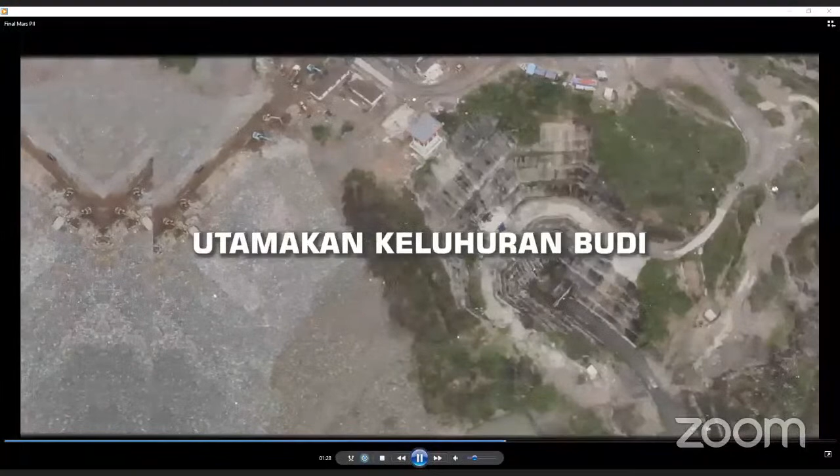Nasionalismenya, utamakan keluhuran budi, amalkan ilmu dengan kompetensi, berikan yang terbaik, selalu yang terbaik, sebagai karya baktimu. Teruslah berjuang membangun Indonesia, sejahterakanlah bangsa dan negara.

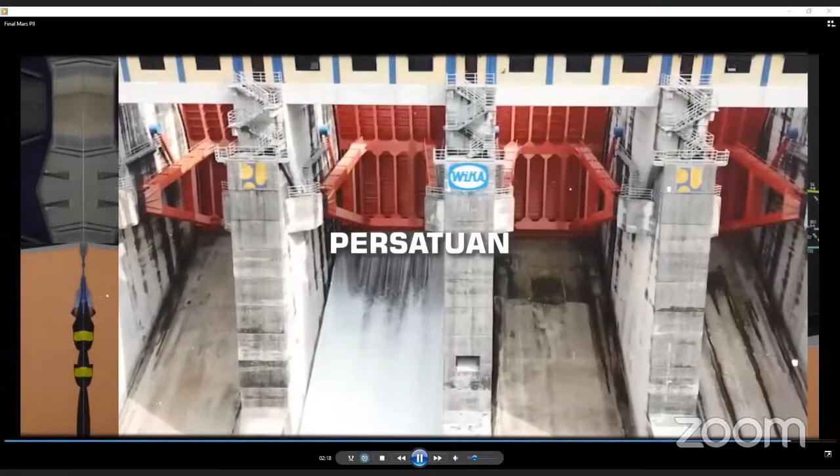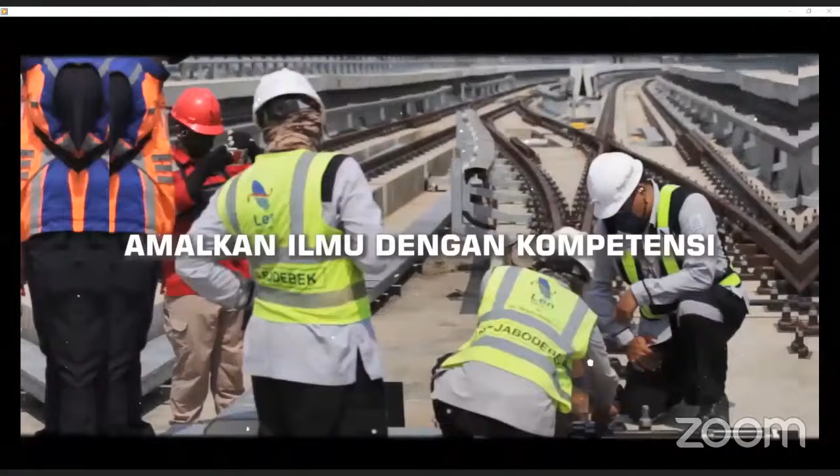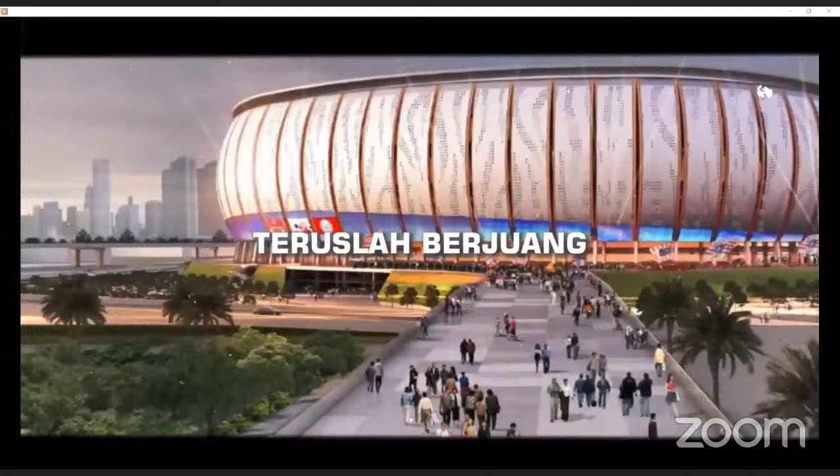Insinyur Indonesia senantiasa menjunjung tinggi integritasnya, bekerja sungguh-sungguh dengan semangat profesionalismenya, utamakan keluhuran budi, amalkan ilmu dengan kompetensi, berikan yang terbaik, selalu yang terbaik, sebagai karya baktimu. Teruslah berjuang membangun Indonesia, sejahterakanlah bangsa dan negara.

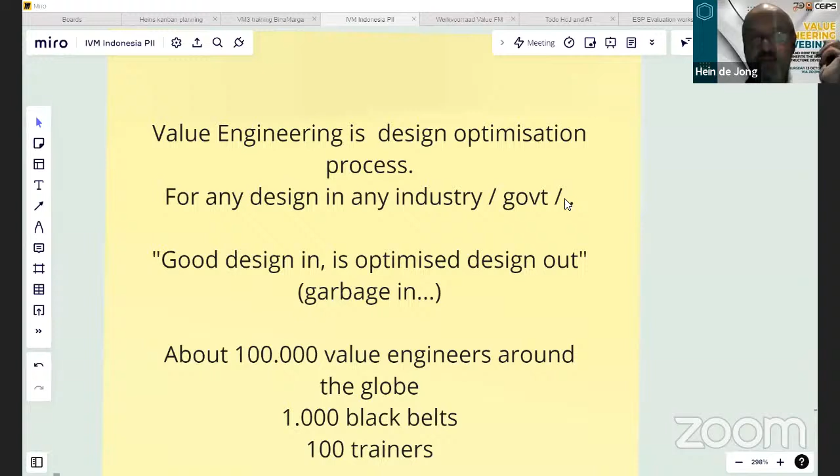Never mind the storm. So it's a design optimization process. Any design can be optimized in industry and government with value engineering. A good design in is an optimized design out if you use this process. Also true, if you put garbage in, it's garbage out. Meaning, we want a good design to optimize, else the conclusion is just that it's a bad design.

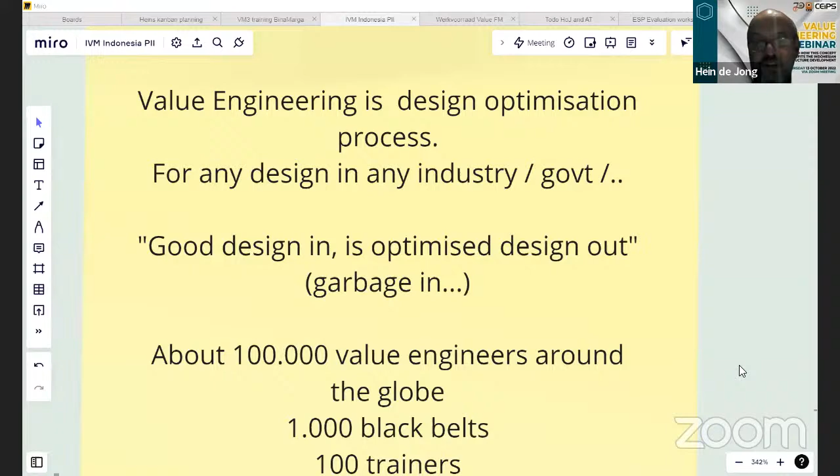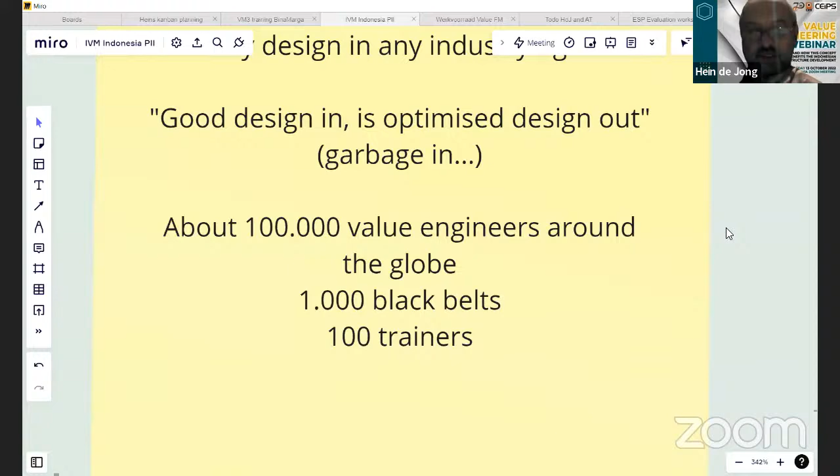There are about 100,000 value engineers around the globe. 1,000 are black belts, those are the heavyweights, and there are 100 trainers. Like PII, there are organizations in Belanda, Germany, USA, Malaysia, Hong Kong, United Kingdom, Australia, Canada, and now PII, which have communities of practice for value engineering. Those are lively places where people share knowledge, make each other enthusiastic, share examples, etc.

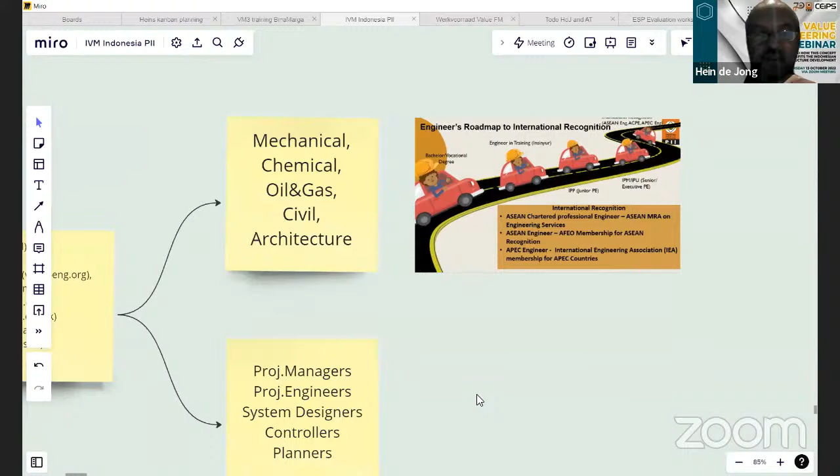It's used in mechanical, chemical, oil, gas, civil, architecture, you name it. And it's used on many levels, from junior - a little bit, not so much - to medior, yes, senior, definitely, to the higher senior level. So the trainings we give are for medior and senior engineers. Project managers, project engineers, system designers, architects, controllers and planners - those are the fellows who can benefit from value engineering.

So I think PII is a good place for us. In the years 2018 to 2022, we did 30 value engineering studies, 12 trainings, had more than 80 people in Binamarga. I started my project in Binamarga 4 years ago. We've got 84 alumni from VM1 - that's yellow belt, green belt - VM2, black belt, VM3. If they get more than 400 hours, they can become PVM, a practitioner in value management.

Can I continue? Yes, go ahead. PVM International Certificate is valid in Europe, and you can cross-certify with the United States. If you work in a multinational, for example, they will know value engineering. And if you have more than 10,000 hours in value management, you can become a trainer, meaning any trainer in the TVM certificate is a very experienced fellow.

The ESP program we did is a program of a lot of projects. It paid itself back about 500 times or more. So actually, Binamarga gets this all for free and earns a lot of money. That's a good deal, isn't it? Not many trainings can make this so clear as we can, because we save money.

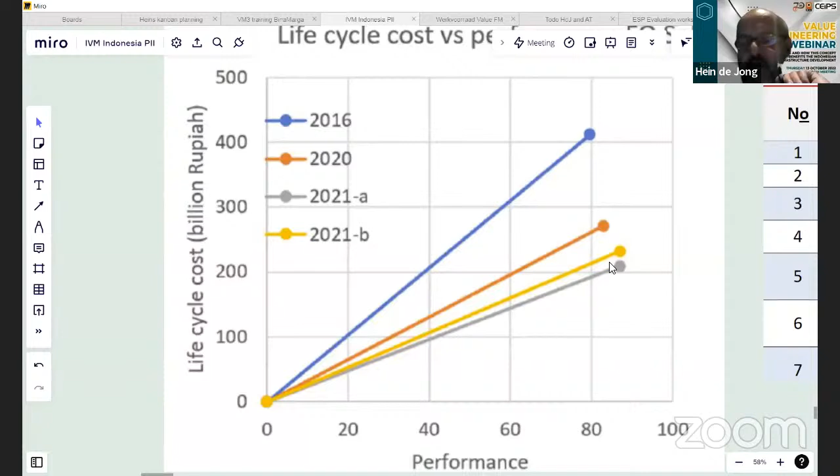So we did a value engineering study, and the price went down - optimization number one. Then we did another optimization, and it went even further down, from 280 to about 230, and one was even at 200 - another saving with higher performance. This is very typically value engineering: can we make it cheaper and get better function and performance? Or if we add a little more money, can we get a way better performance?

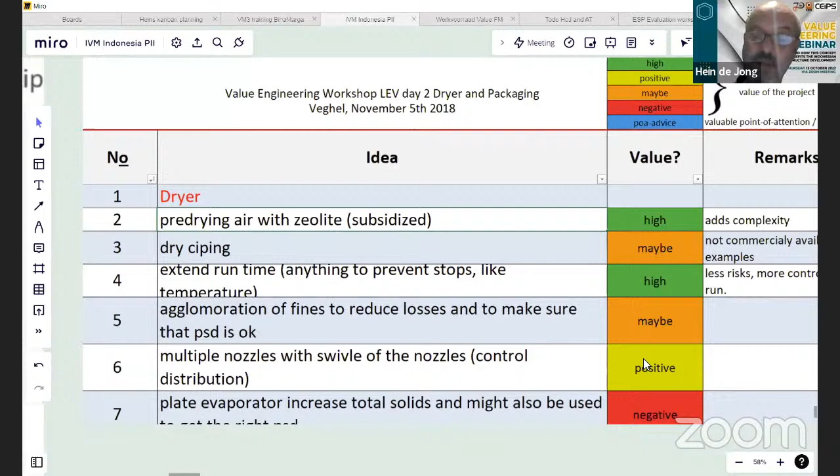Another way to get results is like this: a table with a long list of ideas. This is apparently in a food factory, process industry. You do your value engineering thing - you investigate, prioritize, etc. - and in the end you have a list of ideas with high value, positive value, or maybe unknown value yet. This is the kind of outcome you want to see from a value engineering study: lots of optimizations, sometimes in the form of a complete scenario for a topic, sometimes as a list of good ideas to implement.

No, wait, I moved that.

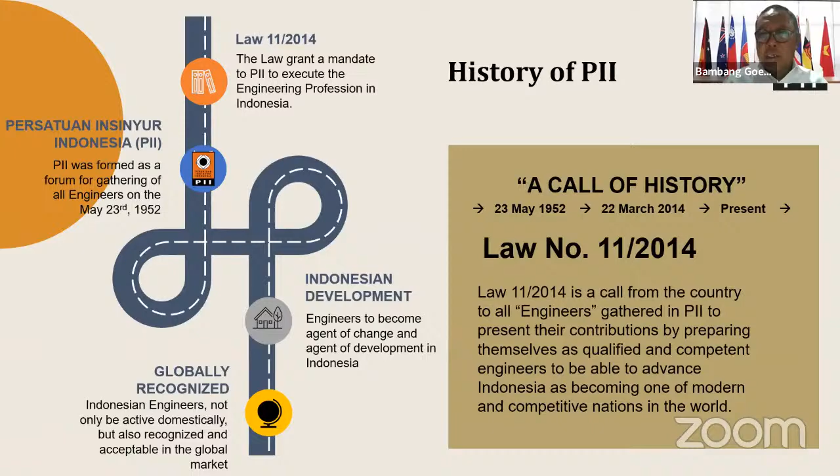There are 3 elements under the law. Firstly is collective message for engineers, as I mentioned before. And then the law also described that PII is the implementing body of the engineering profession. And then thirdly, the important part of the law is that the government, PII is the government partner in preparing human resources engineers to support national development.

So we often call this the transformation of the engineer, where the task of PII becomes very large now. Firstly is accreditation of engineering education in the university, and then the engineers profession program, what we know as certificate competency engineer.

The engineers profession program is conducted by university but still supported by PII. So graduates from university are basically still sarjana teknik, but need to be trained about 1 year to become an engineer. In this duration, PII takes a role to support the training and the preparing of lecturers, and also in providing the industry or factory or place to practice his engineering practice, in order to familiarize the practical engineering to the student.

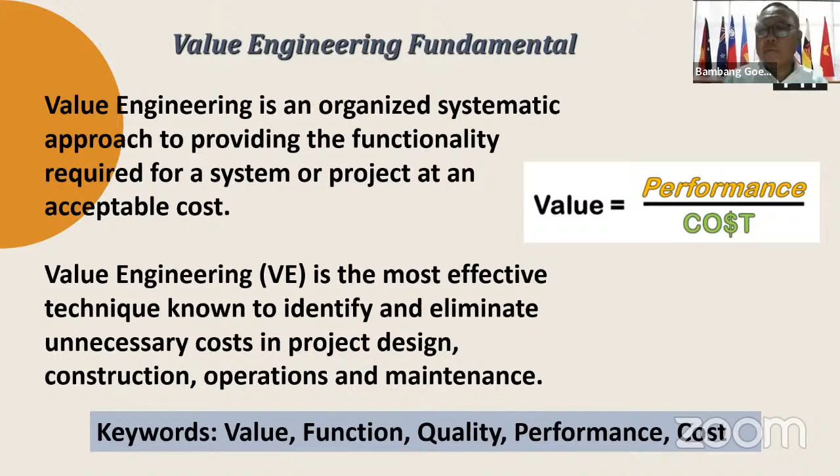The reason why do we need value engineering? It is very important for investment, both by clients or engineers. First, value engineering is very important in order for us to more easily achieve mission and vision. Why is that? Because the cost is lower, of course. There is no value engineering which creates more inefficiency - it must be an efficient way.

Then second is improving Indonesia's competitive capabilities in construction, manufacturing, oil and gas, mining, operation and maintenance. And then also for project owners, it simplifies the decision-making process and reduces risk in the project or system, and optimizes costs in achieving effectiveness.

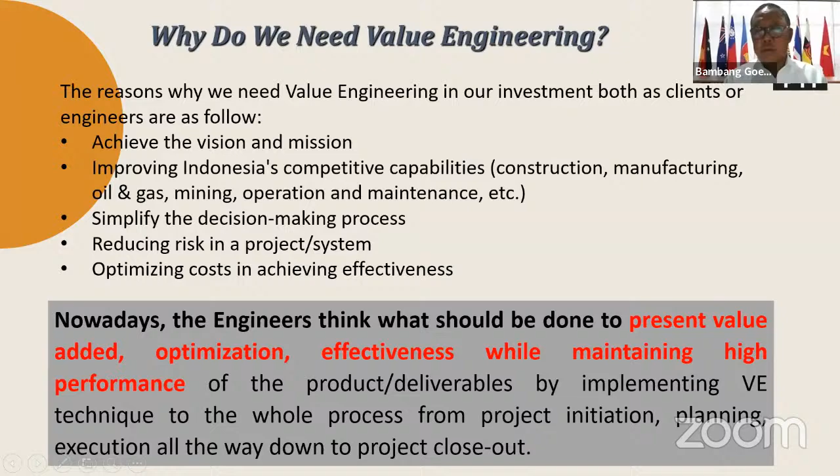Then how does PII bring this up to speed? Under PII we have a unit called the Center of Engineering Industrial Policies, or CEiPS, that will initiate VE community of practice. I think the chairman or head of the chiefs is already in this room as well.

And then invite all engineers, professional engineers within engineering colleges, badan-badan kejuruan, which is about 27 badan kejuruan under PII, to upskill their competencies on value engineering. And then promote VE through a series of webinar courses, and promote Indonesian professionals to obtain qualified and certified value management. And finally, also promote these VE benefits to both government and private clients.

As far as I understand, some government offices, ministries, are already applying VE management in their activities - as I heard, Bina Marga has already done this. But I hope that it will be enlarged, broadened up to many more government agencies, ministries, etc., and also in state-owned companies.

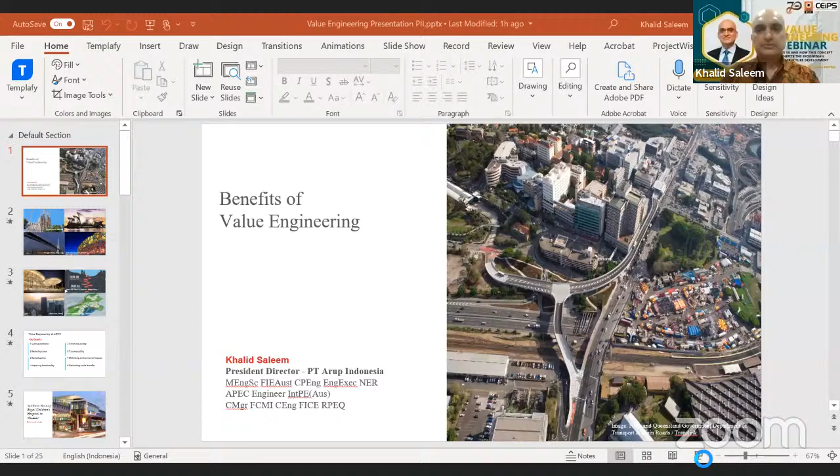I will be talking about a project, really looking at what you've already heard from other participants about what value engineering is, but I'll take you through the application of value engineering.

Just a brief introduction of myself. My name is Khalid Saleem, I'm the President Director of PT Arup Indonesia. I have a background in structural engineering, particularly in design and construction of bridges. I'm very passionate about bridges, hence my presentation will be about a bridge engineering project.

Before I start, a quick introduction about Arup. Arup is a global engineering firm from the United Kingdom. We have done a lot of iconic value engineered projects around the world, including examples like the Sydney Opera House in Australia, the Stonecutters Bridge in Hong Kong, which is a cable stayed bridge, and the Bird's Nest Olympic Stadium in Beijing. All of these projects used value engineering to come up with really fantastic solutions.

There are some examples here from our current and recent projects in Indonesia. Arup was involved in the Indonesia Convention Exhibition, ICE, in BSD City, and the Menara Astra, which is the tallest building in Jakarta at the moment. Recently we completed the master plan of the IKN, the Nusantara new capital city, working on that for 2 years with detailed planning. We are also currently doing the detailed engineering design on an underground section of Jakarta MRT, from Harmoni to Mangga Besar. All of these projects are not ordinary projects - that's where you need innovation and need to apply value engineering concepts.

The definition of value engineering has already been put forward by other participants, so I'd like to talk about the benefits of value engineering. Value engineering is used for solving problems. It reduces costs, it reduces time as well - you can finish the project earlier, much faster. It can improve functionality and quality. You can make a project adaptable for future use. We can also use it for minimizing environmental impacts of a project and maximizing social benefits.

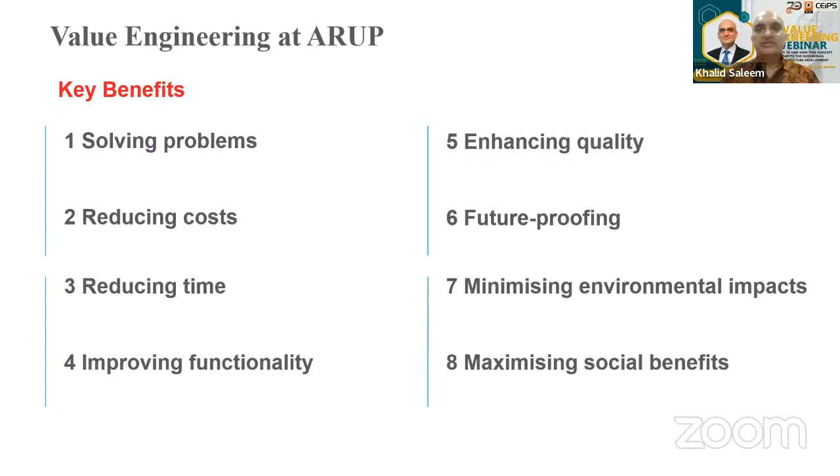I'll now take you through a practical example from an earlier part of my career - a project where every section required us to apply value engineering. It actually won 22 awards, which I'll take you through briefly later. This project finished 2 months earlier than scheduled, and we ended up with a cost saving of $16 million. This is a bus rapid transit project in Brisbane, Australia, called the Northern Busway.

Some details of this project, with some photographs - this is during construction. As you can see, it was constructed through a hospital, the main hospital in Brisbane, Australia, and over arterial roads, main roads, and an operational railway. The project was a 1.2 kilometer long dedicated BRT, fully elevated on a bridge - it doesn't go on a normal road like Transjakarta, but has a separate alignment and corridor which is elevated, all on a bridge.

And then it has a 3-story busway station. The bridge actually passes through the 3rd story where you get on the buses, but coming from the ground floor, you get your tickets and go onto the 1st floor. And then from there, you go onto the 3rd floor to get onto the buses.

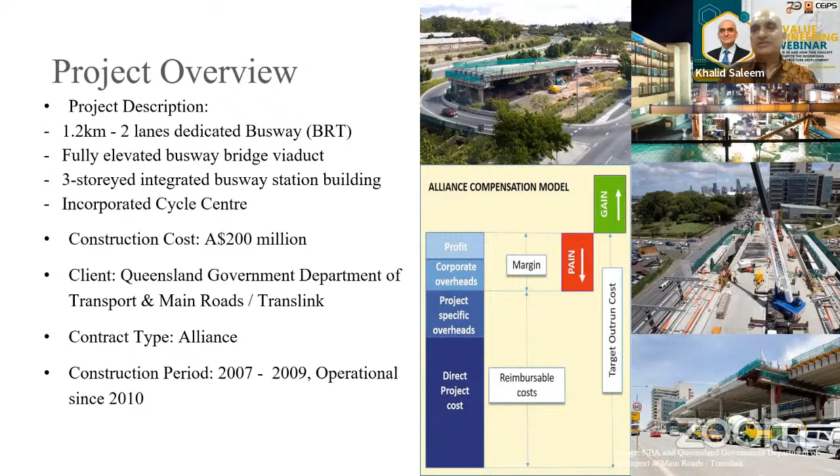This is not a new project, but you will see that if you want, you can use value engineering concepts wherever you are. It's not a new concept; it's been there for quite some time. This project is almost 15 years old. It was constructed from 2007 to 2009, and it's been in operation, with buses using it since 2010. So there was a lot of complexity, and hence we had to use value engineering.

As I said before, as you can see from this picture, it shows what we commonly referred to at that time as the spaghetti or noodle junction, because you can see roads and bridges going all across everywhere. So there were lots of challenges which made this project very complex.

It is constructed inside a hospital, so we had to allow for ambulances and other emergency vehicles coming into the hospital 24 hours, all 7 days. So we had to design for it through value engineering, and we had to construct for it as well with all these issues. And then there were lots of services, like gas, electricity, and power, which supply the hospital here. We had to make sure those were protected, and the supply of electric power, water and gas to the hospital was not disturbed during our construction, and there were no accidents that could adversely impact the hospital.

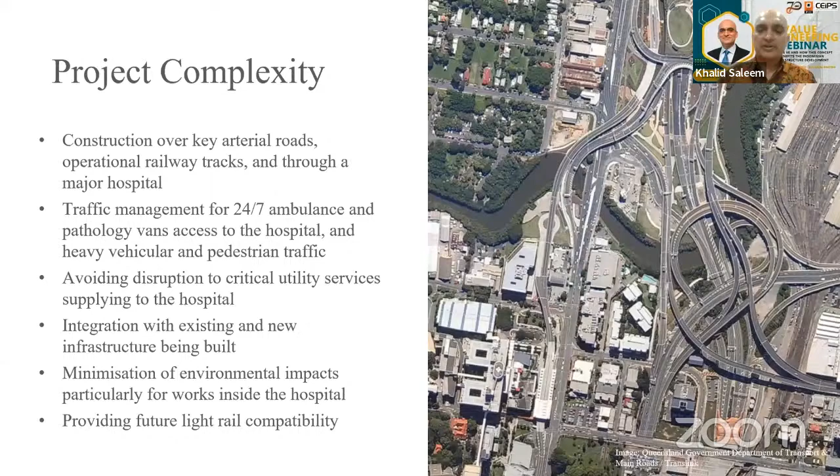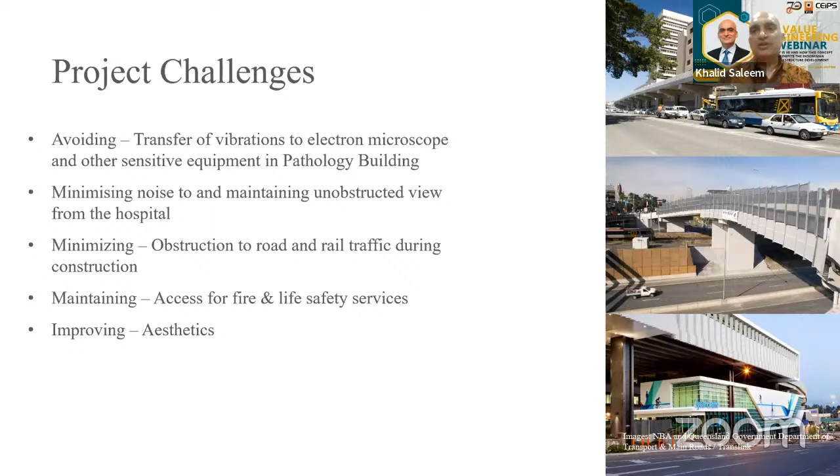Hence, we said we can't use the original design and we have to value engineer this and come up with a new design, which will help us meet all of these challenges of keeping the footpath width, not affecting the services, and providing access, etc.

So as we said before, what can value engineering help with? It can help us in solving problems, it can help us in reducing the cost, and it can help us in doing the construction faster.

In the picture, we were looking at the footpath underneath, as shown in that plan. Normally, if we are constructing a bridge, the columns you are seeing here are actually not in this direction - they are parallel to the beam above. But because we had to keep the footpath below clear, we decided to value engineer it, so we rotated the columns 90 degrees. So now they are parallel to this, and they are not in the center of the bridge as well.

They are actually on one side, so we again still have the same problem of the bridge trying to fall over or overturn. And then because of this very huge bending moment, which is the bridge trying to overturn...

If we had used normal piles like this, where your structural capacity actually comes from the steel reinforcement bar, which is as far away from the center or the neutral axis. If we had adopted this section, we would have to literally fill all of this space with reinforcement bars because of the huge moment trying to make this bridge topple over or fall down. This was not workable. So what we did was, first of all, we rotated the column this way, and then the piles below these columns. What we did is we said, how about we drill two piles next to each other and drill the space in between as well.

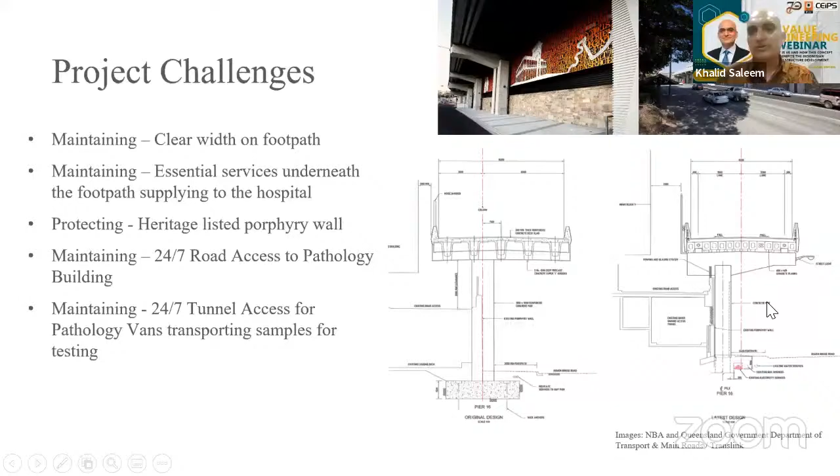We used a temporary steel casing or liner and drilled the pile through this, so there was no impact at all on all of these services. We didn't have to relocate them, we kept them in place. So it saves us time, it saved us cost, but also, as I showed you before, it helped us in reducing the steel reinforcement with the value engineered solution we adopted. So it solved our problems, it reduced the cost, and it reduced the time as well.

But then what do we do? Because with this arrangement we have, we still have to have this beam, which you saw before, on top of which we are going to put our bridge beams, which go along the span - I'll show you in a minute. So we had to again reduce the weight here.

So we said, how about rather than having a horizontal, very deep pier cap, we taper it to reduce the weight? So we use pre-stressing, but we reduce that moment which is trying to overturn and make this bridge fall on the road, significantly, by reducing the weight.

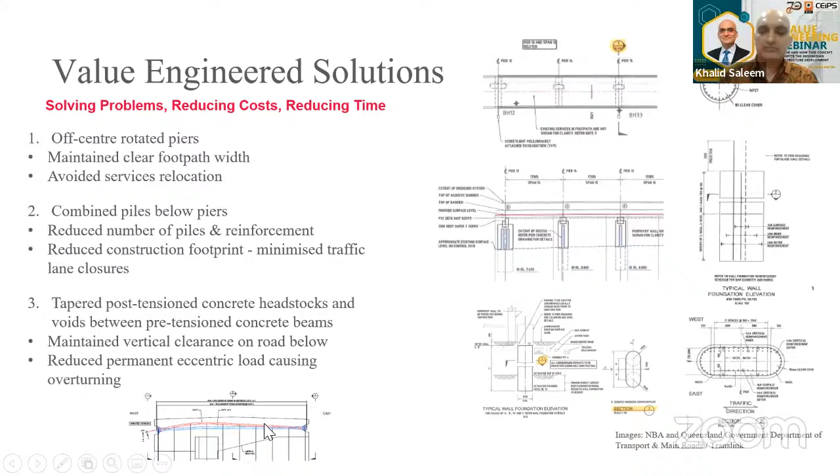And then this is a complete picture of what we were looking at before. As I said, this building has an electron microscope. So what we did was we actually came up with a floating bridge structure, which means we used very small spans - because big spans mean big forces going down and going in - but also we use thick bearings, and all of this is all the way through.

We have not actually tied the bridge to any of the columns below. We're still restraining it laterally - for example, if there's an earthquake, so it still doesn't go and fall down either way. But we reduced, as I said, the weight here by tapering this. It also gave us the vertical clearance which we required on top of the road below. But also, as you see, we have taken off some beams here as well to try to reduce the weight.

So, I'm sorry, it's a very technical presentation, but I wanted to take you through the concepts of what you can do. We can design a bridge or a structure in any way, but if we pay attention to different aspects, we can solve all of these other problems we were looking at before. So by doing this, we actually also kept all of our construction outside of the heritage listed wall, which we were not supposed to touch.

We did not have to demolish this tunnel where all of these blood samples come into this building, so we did not actually impact on anything. The road access was maintained. All of our construction happened outside. We were able to maintain the footpath width, and we did not relocate the services.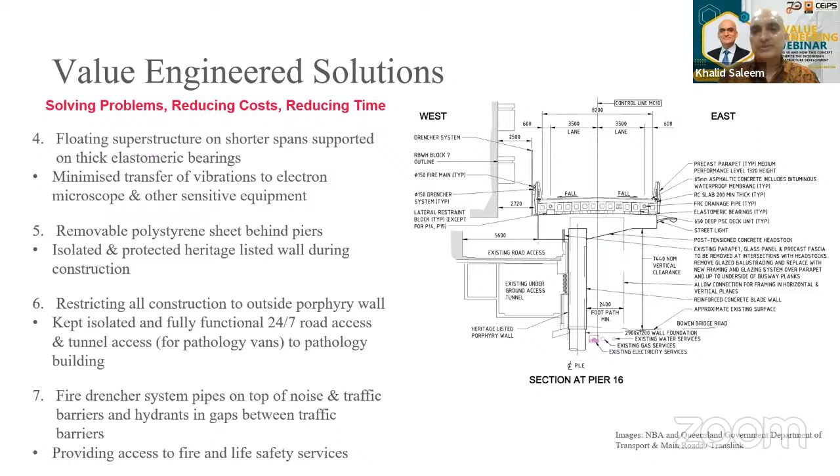So going further, how do we save costs? We tried to standardize everything, so all of the spans are equal length as much as possible, all of the columns are the same dimension, all of the beams are the same dimension. We even tried to keep the steel reinforcement bars the same, so there's an easy way of checking what we have done because there's a lot of repetition.

Once we checked one drawing, it means all of the drawings for the other spans are checked as well, so it saves a lot of time and mistakes on site. It also helps the contractor because they can use the same formwork again and again, saving a lot of time and cost in assembling new formwork. So a lot of cost saving and time saving.

This is an old project, but because the reinforcement was very complex, we did 3-dimensional modeling of the reinforcement about 15 years ago, drawing different reinforcement bars in different colors to make sure we could easily see any clashes and how much clear space we needed so concrete could be poured and vibrated. We looked at all of this constructability as part of our design. That helped a lot in design and construction, saved time and cost, and solved all of the problems I talked about before.

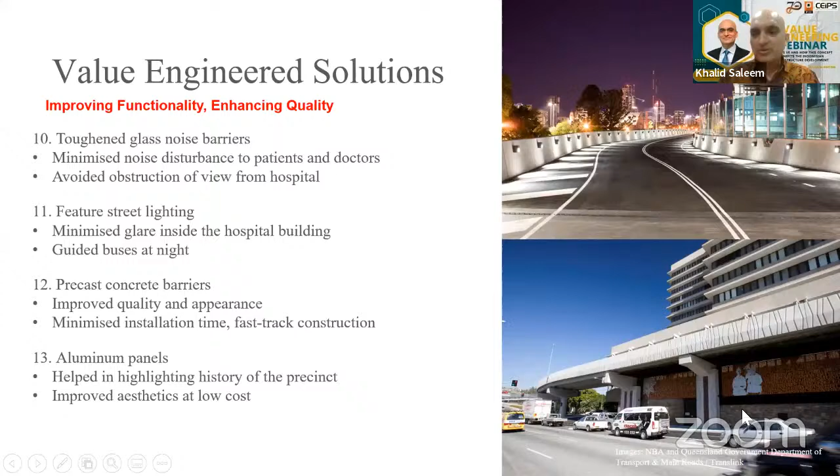Not only were we saving costs, because making concrete with a lot of patterns like this is expensive, we came up with an easier, cheaper solution using very thin aluminum sheeting that hides all the bad things behind it and makes it look nice. The wall below we didn't touch, so it was maintained since it's heritage listed, and we didn't have to take each stone out, number it, and put it back.

As you can see in just one section of this project, a lot of value engineering went in, and we solved problems, tried to reduce cost, and tried to reduce construction time.

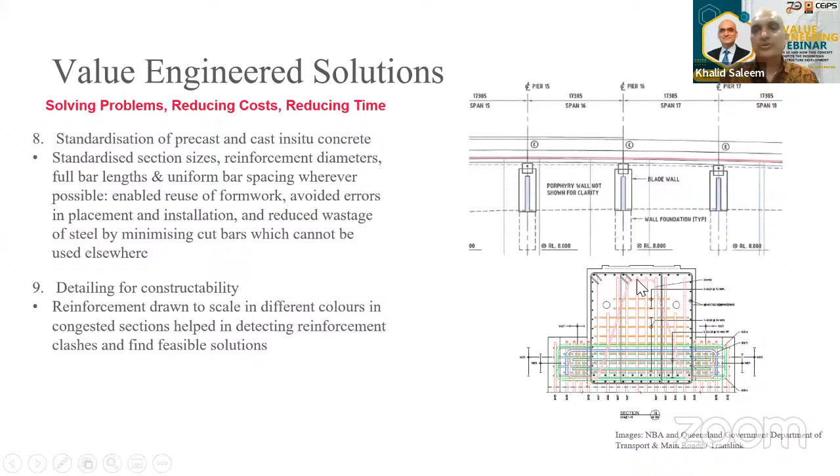At that time we were looking at the reinforcement we saw before. Now people use BIM, Revit, Tekla Structures and other software to do this, but back then it was done just using 2D CAD, and we still looked at constructability and other things, even though nobody knew what BIM was or what it could do for you.

Because this was right in the center of the city, very busy with the bridge going over railway tracks and roads, we actually did three-dimensional modeling using whatever technology was available at that time.

We wanted to check if we used a crane to bring in this precast beam, whether it would actually fit onto the span or not. So we used 3D technology and modeling to check our construction and installation tolerances.

We also developed a tool, again a three-dimensional display which I'll share with you later, built for two purposes. One was that there were lots of stakeholders, including the hospital, commercial tenants, the car park, and everyone wanted to know what the project would look like once constructed.

People asked why we weren't making it underground, said it would obstruct the view and make the city look ugly, and everyone was objecting to the project. So we had to develop this three-dimensional model to show them that it actually looks nice.

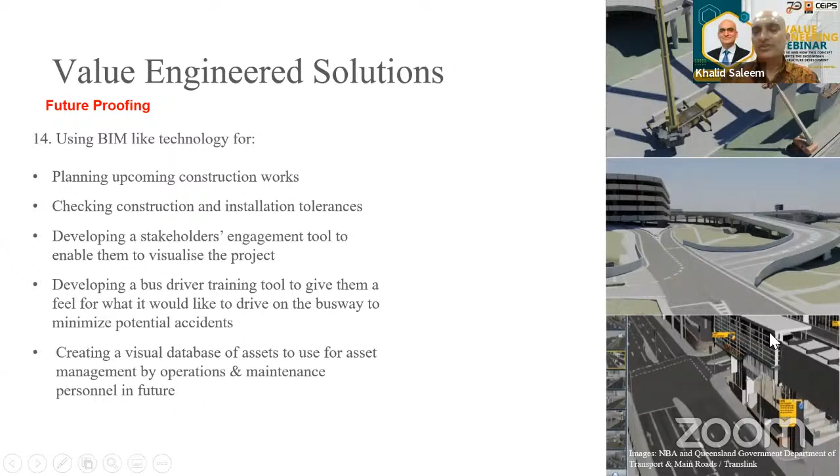Once the bus driver will drive and once the project is finished, what will happen then? During asset management later on, when people come to do maintenance or want to know what is actually inside, what size the beam is or what is in here, all of that was documented at that time.

As I mentioned earlier, although this project has been designed for BRT, the client wanted us to make sure it can be changed into light rail transit, LRT, or MRT in future. So we had to think about that during our design and construction. Now this project is still a BRT, but it can be converted into an LRT with minimum cost and time, because we've already included a lot of provisions that will make changing it from BRT to LRT very quick, easy, and cheap.

Some of the things we did, for example, was the alignment which we adopted. If it's a road, you can make it very steep, up to 6% grade. But if you're using light rail, you cannot use a 6% vertical grade. You have to restrict it to around 3%.

Then the horizontal curves. Normally in a road we use circular curves, but for a railway we have to have spirals on both sides of the circular curve. So although this was for BRT, we designed the alignment for future conversion into LRT, using all the aspects of railway alignment in terms of vertical grade and geometry. Even the bus station platforms were designed keeping in mind that in future the buses would be replaced by light rail.

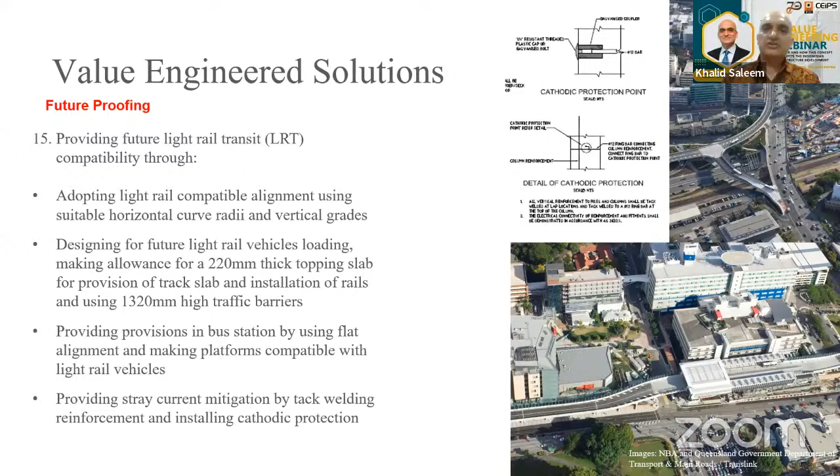Then we talked about using value engineering to minimize environmental impacts and maximize social benefits. We now hear about sustainability and worry about the planet, since we're causing a lot of damage to the environment. So at that time we thought, how about we install solar panels on top of the bus station where passengers get on the buses? Rather than lighting coming from PLN or elsewhere, we generate our own electricity. This was 15 years ago, and we installed solar panels on top of the busway roof to generate electricity for the busway itself.

Then we said, we're collecting all this rainwater here, and there are toilets in the bus station. How about we collect that rainwater, bring it down, and store it in underground tanks beneath the bus station? That water is then available rather than getting water supply from somewhere else—why not use the rainwater we've collected in the bus station where it's required?

Then there was all this empty space left under the bus station, which we thought was wasted space. So thinking again about sustainability, we constructed a cycle center there, where somebody can come on a bicycle. There are lockers and showers inside, so someone can ride a bicycle, lock it up, go to the shower, change their clothes, put their stuff in a locker, then go up the stairs, elevator, or escalator and catch a bus. This encourages people to exercise and saves them from driving cars everywhere—so we incorporated this cycle center into the bus station.

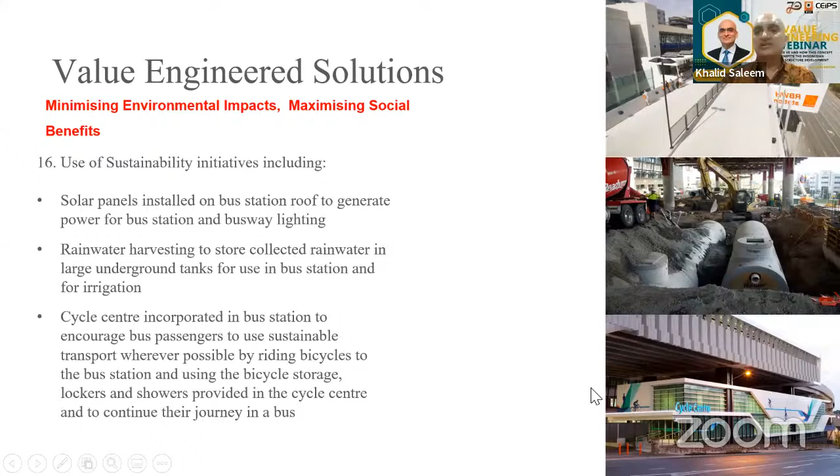So there is a creek which passes through the construction site. The water of this creek is brackish, tidal water which comes from the sea, so it's salty. We didn't want to bring in water from outside for concreting or any other water required, so we installed a mobile desalination plant to purify the water and use it for pouring concrete and all that.

Then it was also thought of that there is construction waste. When we're constructing, we've got steel cut bars, timber or wood from the formwork and all that. So we separated it out right then and there so it can be taken to the relevant disposal place rather than everything going to landfill, wasting material.

Also, as we saw earlier, we try to use a smaller footprint. We kept the footpath but also didn't encroach too much on the ground, keeping everything as optimum as possible - the smallest column size, the smallest reinforcement we can use. So we did that as well.

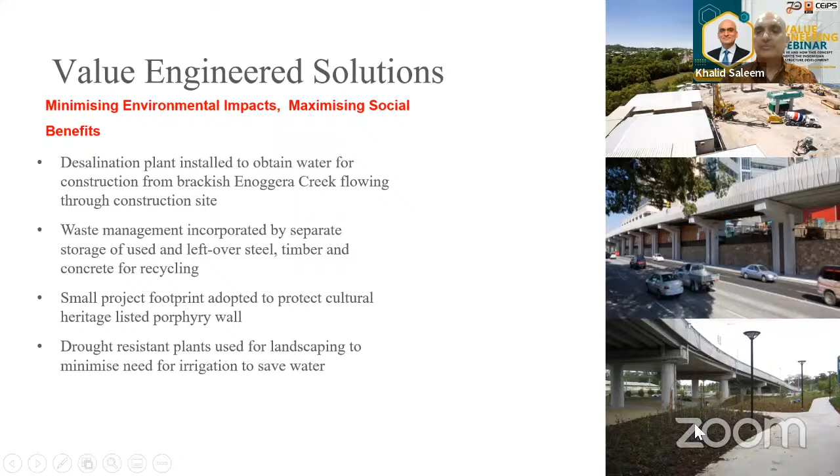For landscaping, we use native plants. We made sure we got consultation from plant experts and asked them what type of plants we can grow here which do not need watering for landscaping. Once you plant them, you just need to water them one time and then they grow by themselves - you don't have to keep watering them. So we thought about that as well and installed the plants accordingly. I think I'm just getting towards the end, so please bear with me.

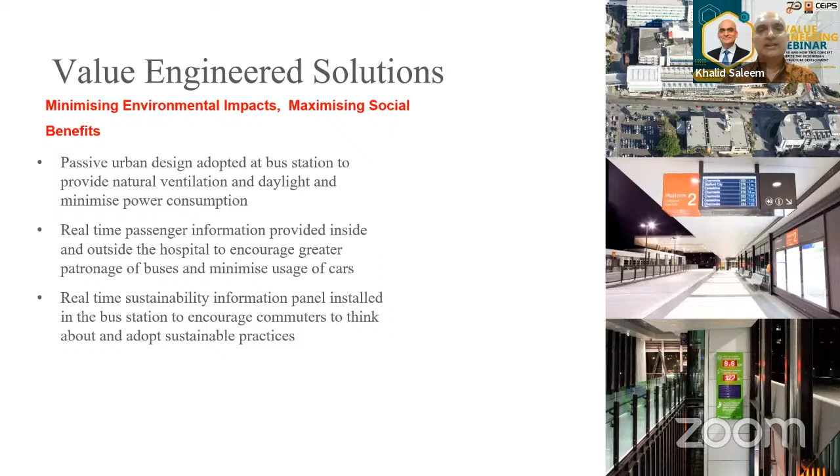We actually put in a sustainability panel to give people information on how much energy is being generated, how much power is generated by the solar panels, and how much water is stored. So just encouraging people. And yes, the client was happy.

We saved $16 million, as I said before. That $16 million was distributed between the government, the contractor, and also the consultant, because that was what was agreed at the beginning - if we save money, everybody will get a share.

Because of the time saving, we finished the project 2 months ahead of program, and the hospital and everybody - nobody had any complaints because we made sure we coordinated with them. So the client, you saw the client letter, was very, very happy and gave us a letter of appreciation.

We won a number of awards from Institution of Engineers Australia. They gave us the award for engineering leadership and project management. We got an award from Australian Institute of Project Management for project of the year, etc. We got awards from the Architectural Institute for public artwork and sustainability.

So I think that's the end of it. I've got that driver training tool and sustainable stakeholders, 3D visualization, which I talked about. I would not show it to you, but I'm more than happy to share it separately because it's about 3 minutes long.

So how do we apply value engineering in Indonesia? Just very quickly, some food for thought for you to think about. If we have a project in the center of a city or urban area, before starting design or construction, we should think about traffic management and suit our design and construction to that. We should try to minimize relocating services like electricity and power - keep it there and design around it.

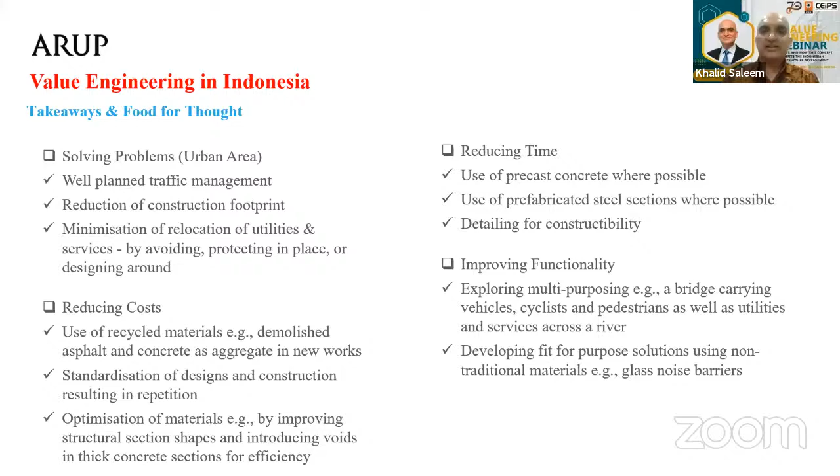We should think about constructability, as I showed to you before, and improving functionality. For example, if we have a bridge over a big river, it shouldn't only be for cars. We can use it for giving opportunity for cyclists, pedestrians, and we can carry services like water, etc. on the other side. We talked about fit for purpose solutions, quality.

That's something which when we're looking at value engineering, we should think about - precast concrete. I talked about future proofing, and environmental impacts.

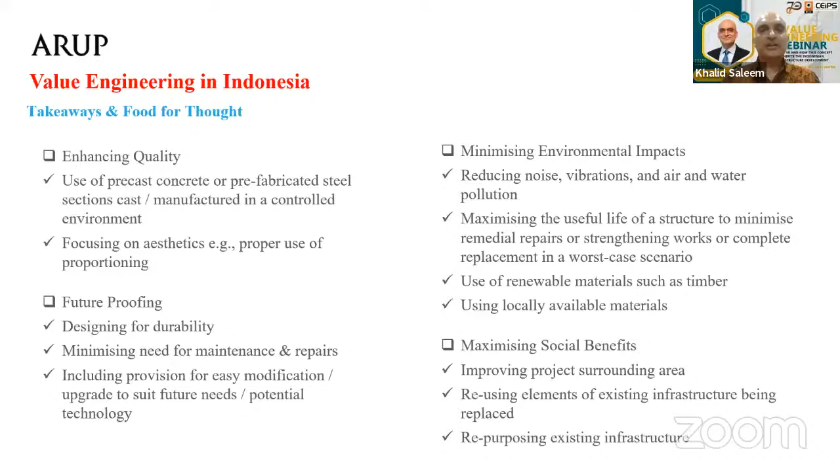Okay, thank you, Pak. Thank you very much, Pak Khalid, for a very detailed presentation on value engineering in civil and structural engineering. So just to summarize, value engineering is not just making a few beams or columns smaller, but it's about looking at the whole picture. So we are way beyond time.

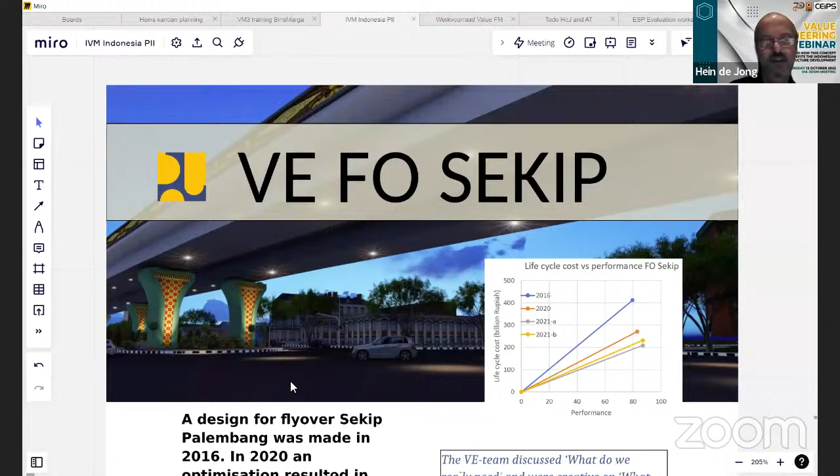I've uploaded a few leaflets from projects in Bina Marga. You can read them. I want to show you one which is in my report now. It was a flyover of Sekip in Palembang. This is an original picture, made in 2016. They optimized it - the project team itself optimized it. So the design from 2016 was optimized, and they already achieved a 28% cost reduction while still a good flyover.

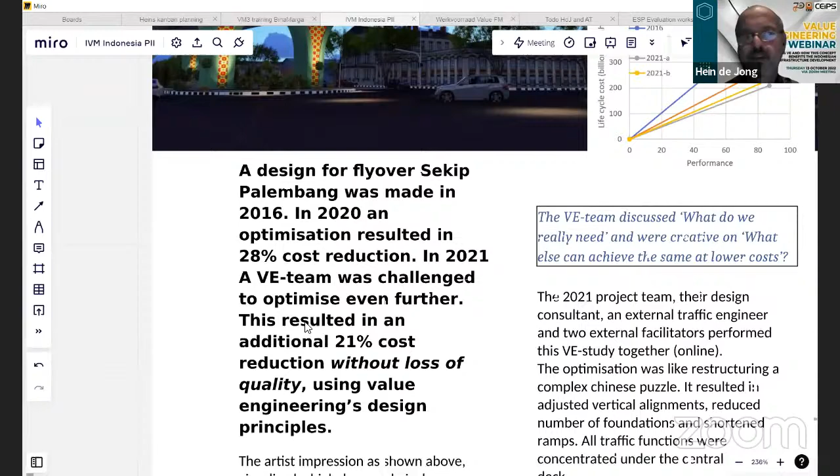And then they challenged the value engineering team again because someone thought we're not done yet. That resulted in an additional 21% cost reduction without loss of quality. So did the designers not do a good job? No, that's not the case. In the first design, they did a good job. In the second design, it was a good job. And in the third design, it was a good job.

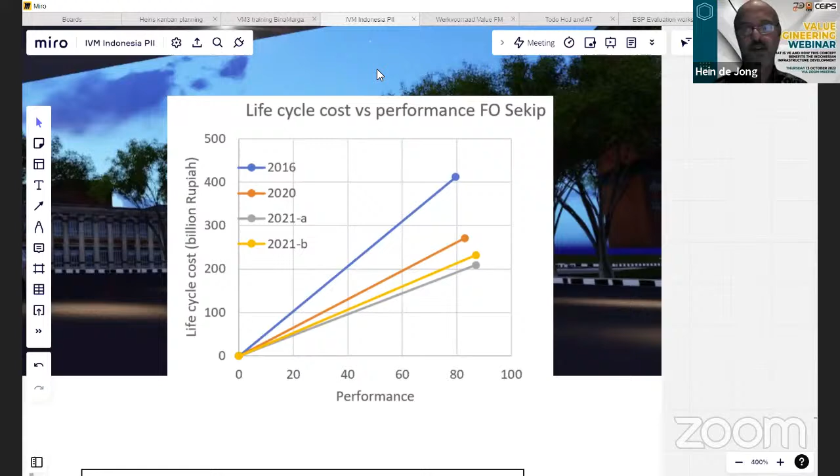Having a discussion on what do we really need and what else can achieve the same at lower cost is something you cannot do alone. So you must have a good design in, and then you start the optimization to get a better design out. That's this picture I showed you, and the other leaflets I showed have a similar story. Make a good design, do your utmost best, and then with a multidisciplinary team and a good process, you can start optimizing. It's an optimization process.

It's one of the value improvement processes. You must always try to do your best, you must always try to make the best design. And then you use the value improving process of value engineering. So it's on top of that. That's how it should work.